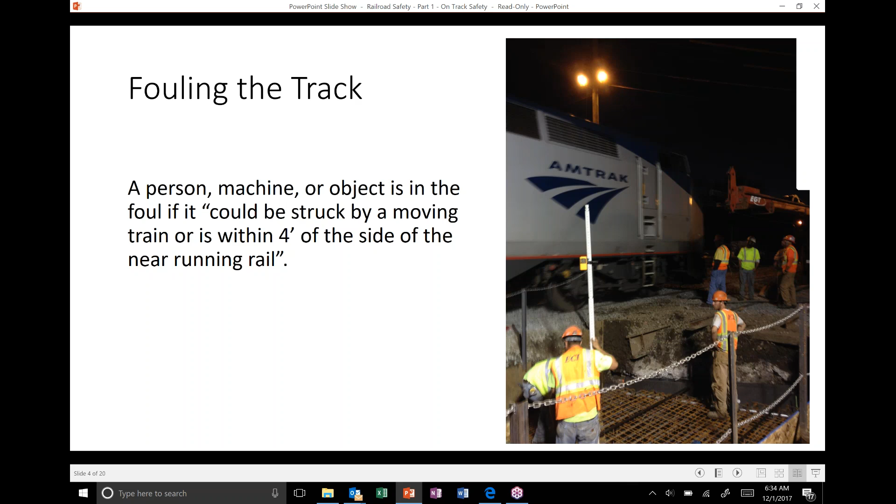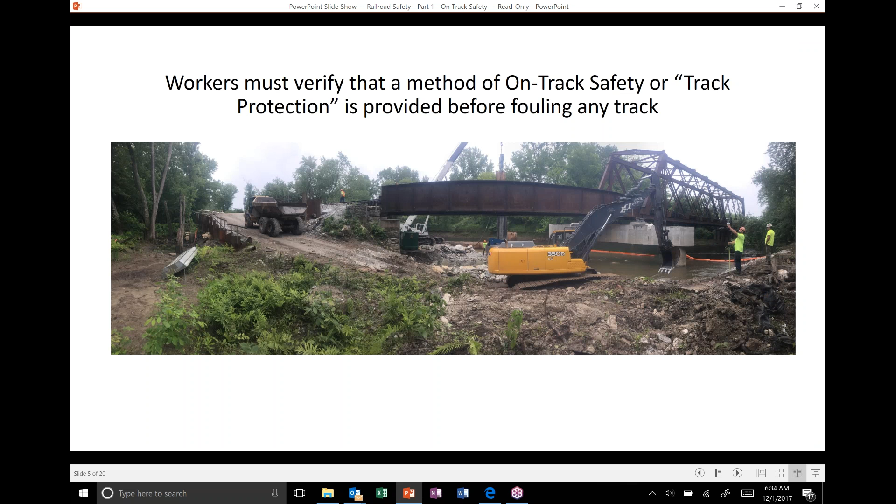So you're required to have on-track safety or track protection before you foul the track. It's any condition in which you, your machine, or material could interfere with train movement or be struck by a moving train or maintenance equipment. The rules state that workers must verify that a method of on-track safety is in place prior to fouling the track. So know before you go - don't just roll up to railroad tracks. You've got to verify that there is on-track safety or somebody has track protection before you foul.

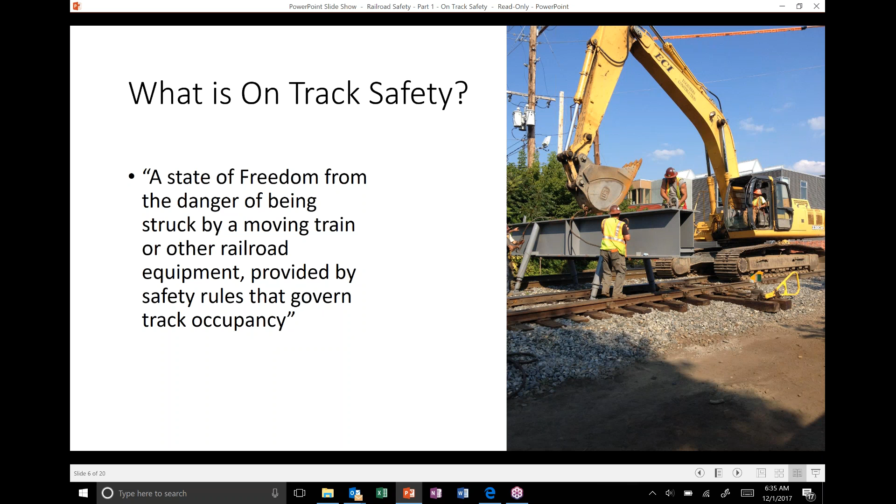What is on-track safety? You need to have this before you foul, but what is it? The definition in GCOR, the General Code of Operating Rules, is a state of freedom from danger of being struck by a moving train or other railroad equipment, provided by safety rules that govern track occupancy. So track protection is usually a procedure, paperwork, that is often coordinated between a flagman and the railroad dispatcher who's in control of train movements, protecting you over a certain area from trains so that you can do work on the property and on the tracks safely.

So why do we need on-track safety? There's a lot of rules around the railroad industry and around track and occupying the railroad. Why is this important?

The reason is trains can't turn. They take a really long time to stop, and when something happens, it's really bad. Unlike a highway, which is designed so that you can stop short of anything you might hit before you hit it, that's not the way railroads are designed. They can't be designed like that.

This is a first-person dash cam, basically, showing what the conductor might see going around a curve. In this case, there's a work crew just down the tracks. He's not going real fast, maybe around 30.

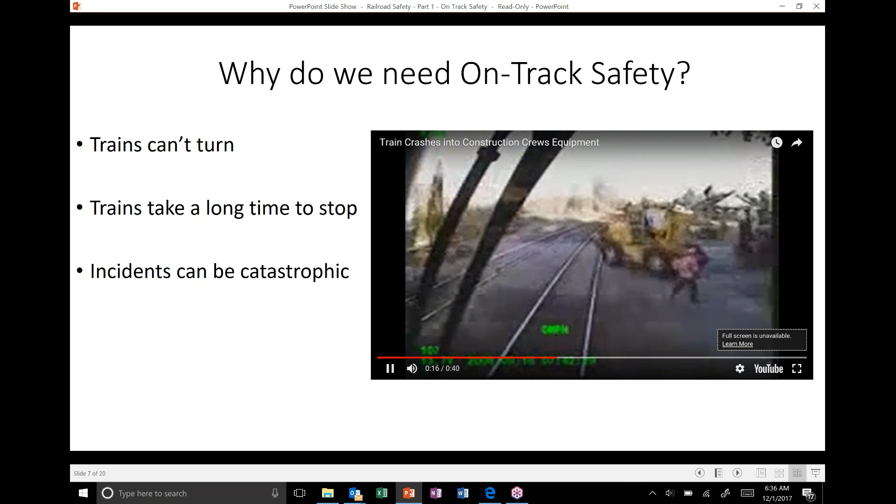He's sounding his whistle. The work crew probably knows he's there and coming. He doesn't see him till right now. He hits the brakes, it's too late. Tags a loader, not that bad. The loader man could have broken his neck. It's hard to say, we don't know. But it can certainly be a lot worse than that.

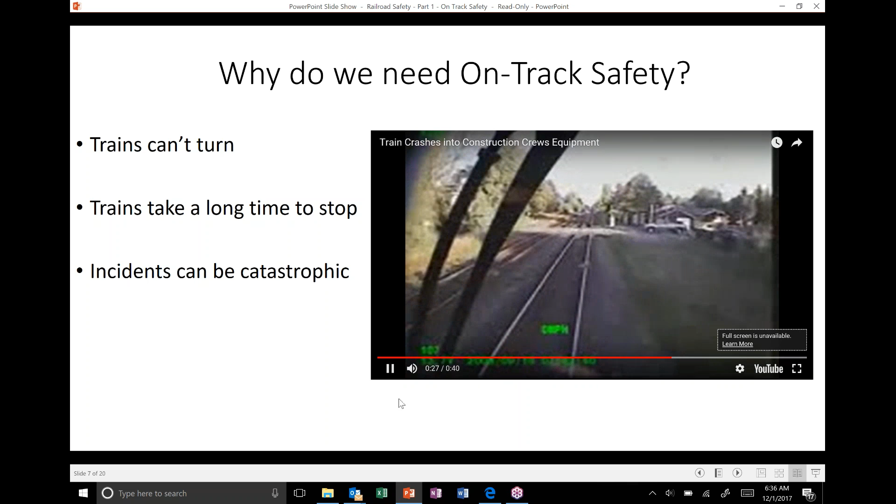That's what the train sees. It's probably not the train that's gonna be the most affected when something happens if we're not using proper precautions.

Here's the other side of things. Here's a low bed with a crane on it stuck on a crossing. Obviously a lot more severe on the receiving end.

So it's really important on track safety. Before we foul the track, we need to make sure that somebody has track protection. How does that take place? That's the railroad flagger, or the EIC, which stands for employee in charge. That's the person that's going to provide on-track safety or track protection for us.

The EIC is usually always a person qualified by the railroad. They're usually a railroad employee. On the New England Central Railroad, we have certain employees at ECI that are qualified flagmen to get track. But on all other railroads, this is going to be a railroad employee.

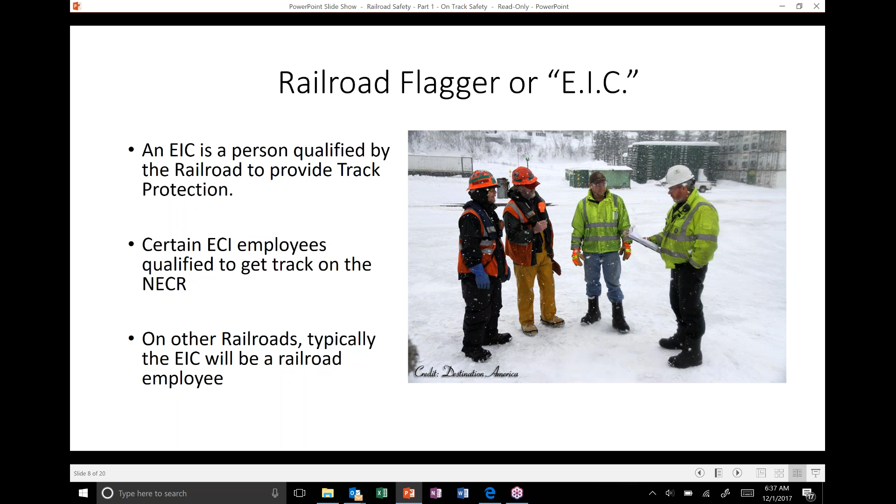The way that we're going to determine whether we have on-track safety, and what the specifics are, is going to be through a job briefing. This is something that's going to happen every shift, at the beginning of every shift. When you do your tailboard, the EIC should be and will be included, and he's going to tell you what he has for track, what the limits of the track are, the specifics, if it's a Form B, what the time limits are.

Those are all really important things to know. You're actually required to keep track of this information. So it may just seem like numbers. 'LYN 55, milepost 38 to 40, do not foul limits ahead of 661.' Well, that's fine, right? It's just a bunch of numbers. Well, yeah, but you need to know that. You are required to know that.

An FRA inspector can ask anybody at any time what track protection you have, what the limits are. So these briefings are very important, and it's very important to take information away from it. The best way to do it is to actually have it written and put it in your pocket. On the G&W roads, we often see really proactive flagmen making copies of their track protection and giving it out. That's awesome - we don't usually see that on Vermont Rail System.

I think a great way to do it is to have a job briefing form. Everybody can fill it out. We've got hundreds of these, I've got them in my office, I'll give them to you. Then, during tailboard, you can write down your track warrant number and your limits. It's a great way for you to keep track of it, and if you have to reiterate it to an inspector, you can do so.

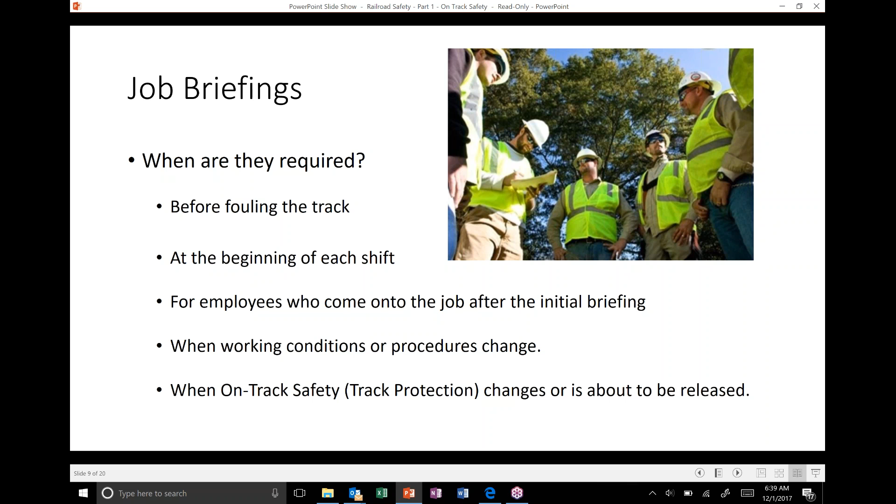We might have a new truck come in the mix. Again, you see your buddies on the track - that doesn't mean that you're good. You need to have a job briefing. Absolutely, 100%. You need to get in touch with the employee in charge and get a job briefing before you foul the tracks, even if other people in your work crew are already fouling.

What are we going to discuss? Method of track protection, the limits, provisions for adjacent track safety. If we've got a siding, how we protect it on the siding - the track warrant might apply to a mainline track, but we might have a different method of track protection on siding. And other normal tailboard topics, designated 911 callers, things like that.

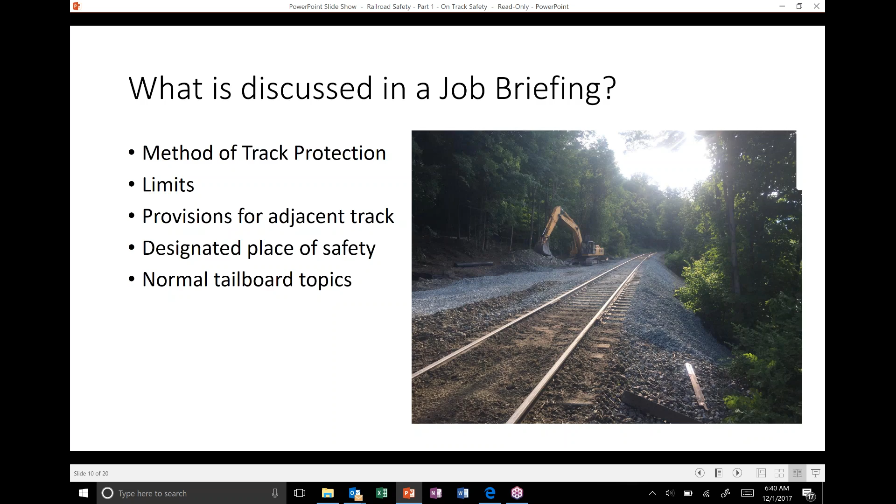So the most important briefing probably isn't that one at the beginning of the day where you learn what your method of track protection is. It's probably when you clear up. That's the most important briefing. Everybody might be there at tailboard and know that we've got a track warrant, and that's fine. But the big potential is when we give up track and we no longer have track protection, we can't be on the tracks. And that's the most important briefing, especially for people that might not be there.

So if the flagman calls the foreman, we got to clear up, train coming, okay, clear up, everybody's in the clear, foreman calls back, yep, we're in the clear, good, go ahead, give it up. That's good. But anybody that comes on after that point that may have been on the tracks all day absolutely 100% needs to be aware of the fact that we no longer have track. This is no longer safe. We cannot drive trucks across it. We cannot walk across it. Stay away. The best way to do that is have a designated person be there at the work area on the tracks and in control of it. That should be the flagman.

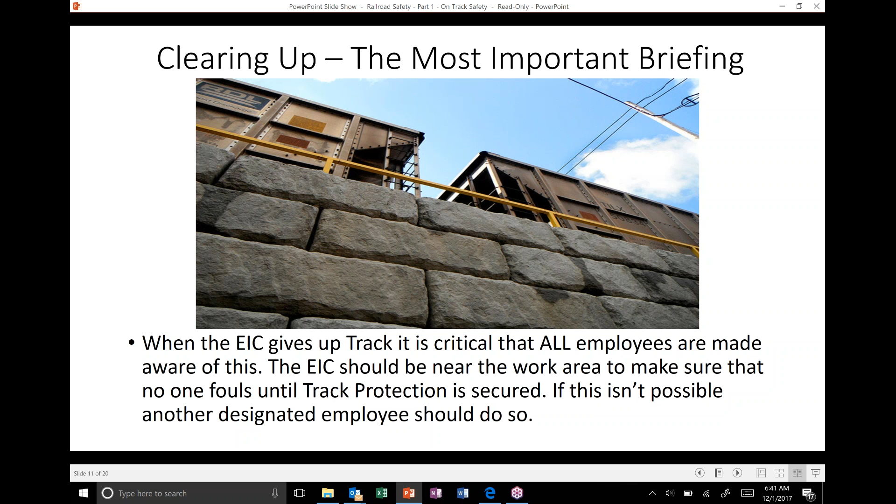That can be tough in situations like we've had all summer down in Addison County. We've had really spread out jobs and several jobs under the control of one EIC. The foreman needs to designate a person, if we can't have it be the flagman, to be there at the tracks and make sure that nobody comes in or out until the train passes and we have track protection established again.

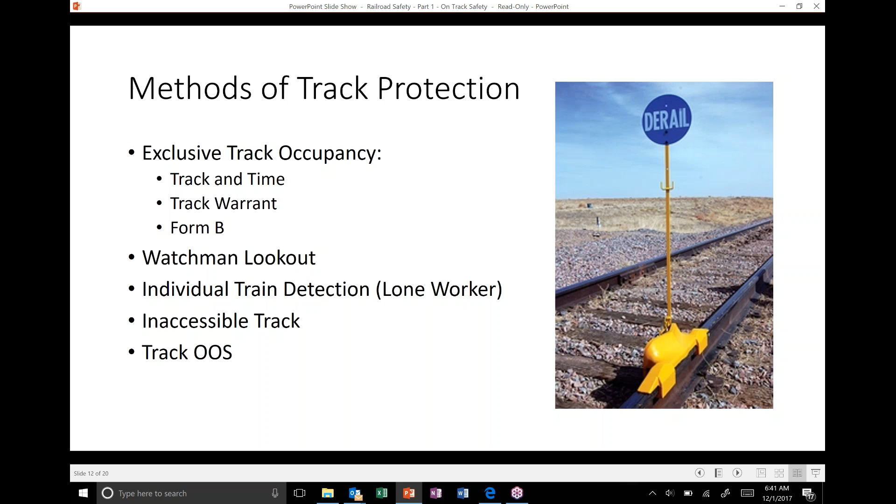Track out of service is another method of track control that you might see, especially on a shutdown for an extended period. If you're going to take the track out of service, you actually take it out of service with a dispatcher, and that's an appropriate way to do it.

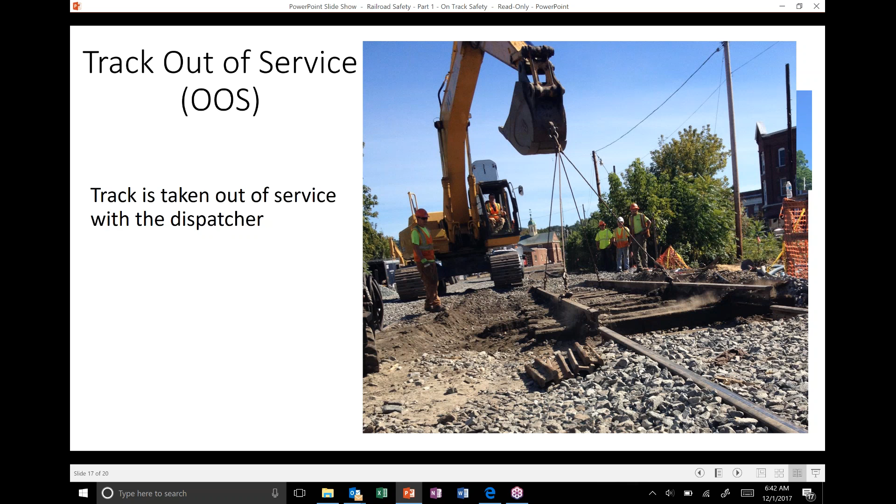So there's gray area when it comes to fouling the track. We learned that if you're within 4 feet of the nearest running rail, you are in the foul and you absolutely need track protection. That's fine. If you have the ability to foul the track, you should consider that fouling. The 210 in this picture isn't fouling, neither is the track truck, neither is, I think that's Scott. But the 210 could easily foul. He's got a swing to the left and he's fouling the main.

This is on the NECR. They're rolling into Brattleboro, so they're not going really fast, but right up the tracks they're going very fast. So if you have the ability to foul, or really any time you're working on railroad property, just assume that you're going to need to have a form of track protection or on-track safety and get in touch with a flagman. Or if you don't have a flagman, you should be talking to your supervisor and say, okay, do we have track, or can we even be there? Is this safe?

Close clearance should be considered too. Just because you're 4 feet away and you may not be technically fouling, that doesn't mean you can park your machine 4 feet off the track. That would still create a close clearance situation.

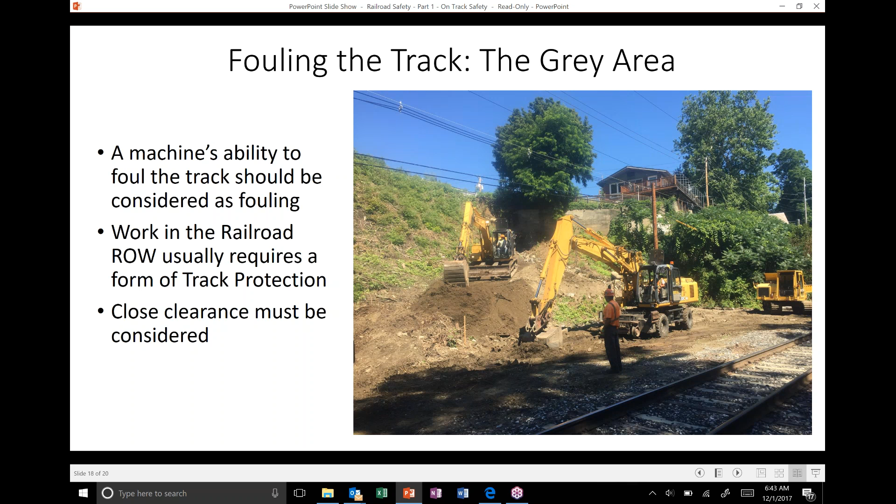When you're done for the day, you need to think about material. A good rule of thumb is bare minimum: any material or equipment that's above the top of rail height needs to be at least 6'6" from the nearest running rail, 8'6" from track center. That is the bare minimum. The further the better.

Additional considerations: even if you have on-track safety, you've got a good briefing, you know where you're at, you need to expect movements from trains in any direction at any time. It can happen. We had 2 close calls last summer. Neither of them were our faults, but one was very close and very scary. It can happen. Track speed can change at any time. A lot of us get used to working in certain places on the VTR with 10-mile-per-hour track, and that's not that scary. A lot of times they can stop short if they needed to, maybe not a big freight, but maybe a light engine could stop short at 10, especially on tangent track. There's track speeds all over the place in the VTR.

We're often working in areas that are compromised. They might put slow orders because we're there, and they can change those without notice. They don't need to tell you that they changed the track speed. We've seen it on the VTR this year. We've seen slow orders get lifted without letting us know, and all of a sudden our 10-mile-per-hour trains went to 25, which is a huge difference. We've also seen rail upgrades this year on our projects in Addison County, which raised the track speed as high as 40. So you're talking a huge difference in your ability to clear for a train.

Be vigilant, watch out for each other, and that's it.

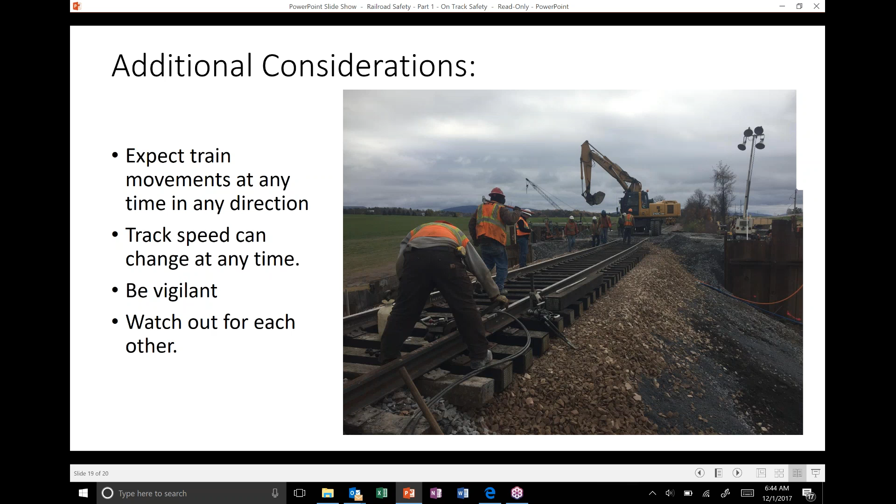On a final note, we lost Obie this week. Obie was Phil's dog. If you ever worked with Phil or on his jobs, you might recognize him. Obie had a quick fast acting cancer, and I think Phil put him down on Monday. So we're gonna miss Obie. That's all I got.

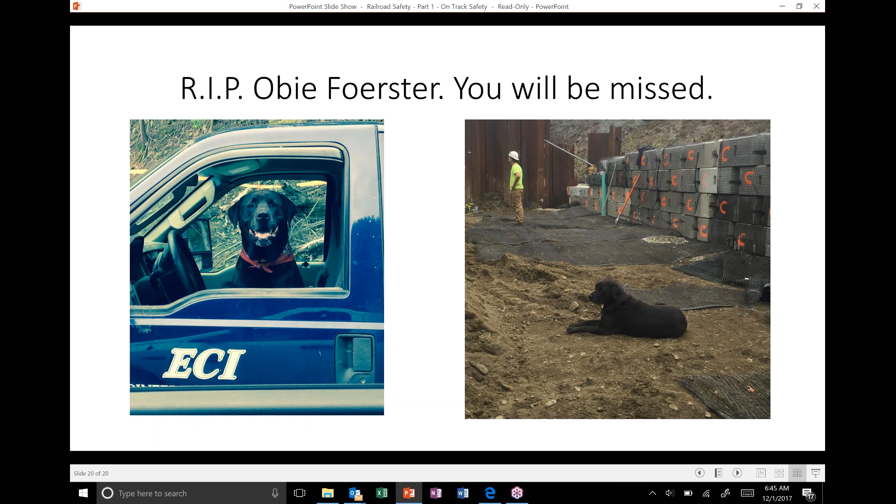Questions? Yeah, I have a question about if you're going to need track protection, who would you contact? Would you call the office? If you're going out to maybe work on a machine or go to a job site, the best thing to do would be to call the supervisor of that job. If not, you can feel free to call me. You can call Ron, or Gene too, but the first call should be the supervisor on that site.

How would you come up with your mile marker? Just give them your location. You don't necessarily need to, if you just tell them the location, they should be able to tell you very quickly if you're protected, if you're in the limits or not. You shouldn't be responsible for determining your location. If you say I'm going to this job site in this general area, they should know very quickly whether you are protected or not. And then before you go, you should still talk to the flag.

I always check in and check out. At least give a wave like I'm out of here, so they know, because it's also very stressful if there is a train coming, they have to get everyone off the track, and it can't account for people who might already have left because they forgot.

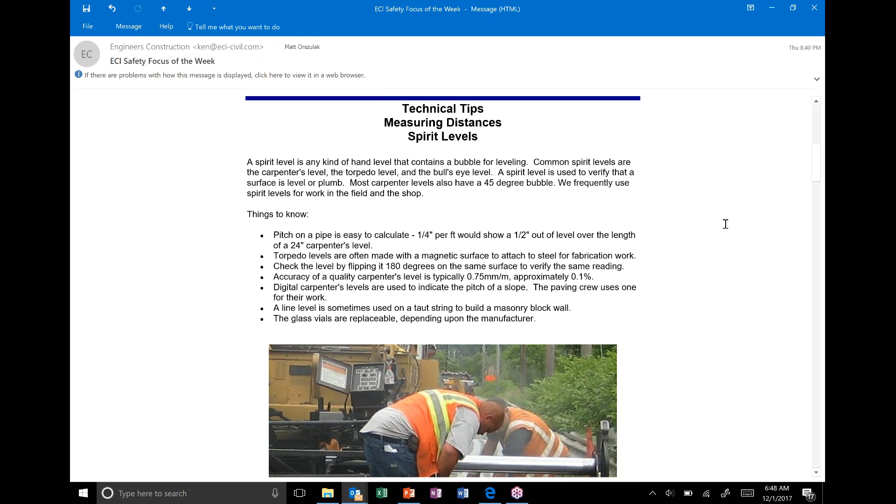There's a few things to know, mostly pretty obvious, but let's go through them. The pitch on a pipe is easy to calculate with, say, a 24-inch carpenter's level. If you have, say, a 1/4 inch per foot, then with your 2-foot level, that's 2 times that 1/4 inch, or 1/2 an inch of deviation from level when your level is level relative to the pipe. So it's a quick and easy check on pipe pitches and slopes.

Torpedo levels are often made with a magnetic surface. Kind of nice, you just stick them on your material, either hang them or even rest them on top. They secure much nicer to metal, obviously, with a magnet.

You can check your level by flipping it 180 degrees on the same surface. If you were level to start with on one orientation, when you flip it around, you should be perfectly level in the other direction. If not, there's a problem.

They could get bent, or the vial of the bubble vial could have loosened up. Accuracy of a quality carpenter's level is typically considered 0.75 millimeters per meter. You can convert that to a percent, and it's about 1/10 of a percent.

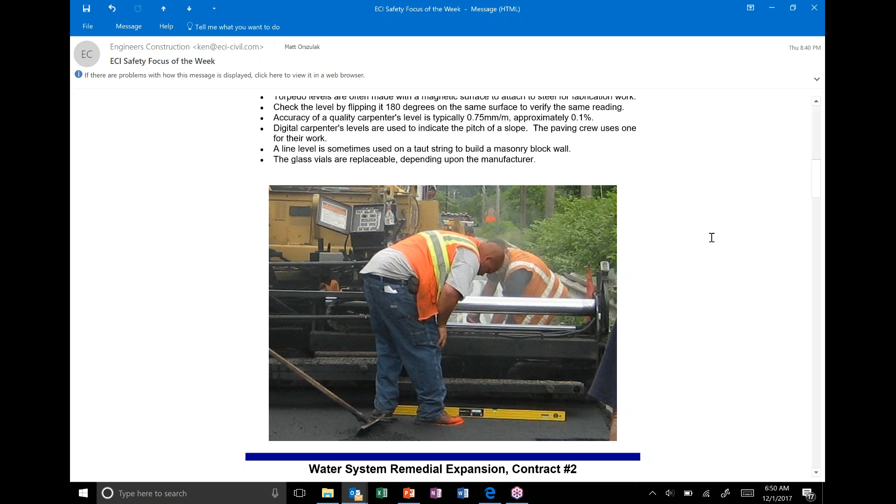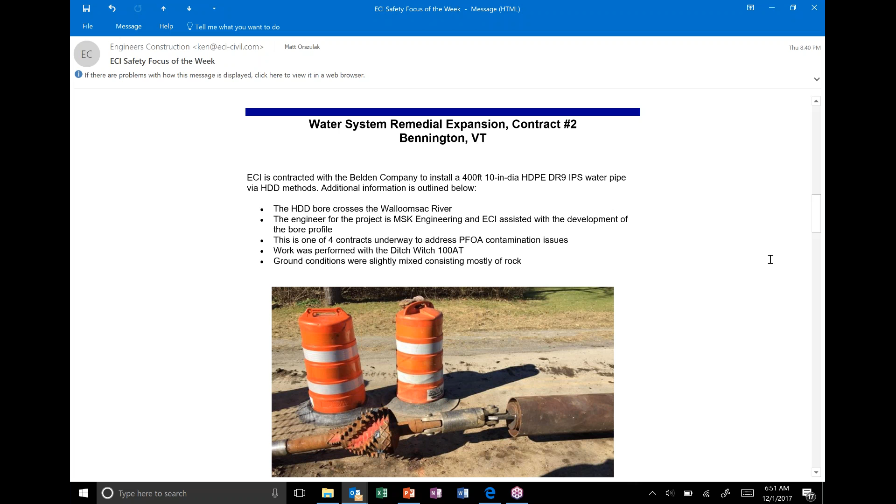For projects, we're highlighting the water system remedial expansion, contract number 2 in Bennington. We're contracted with Belden company to install 400 feet of 10-inch diameter PE pipe, that's a DR9 IPS, as a water line by HDD, horizontal directional drilling methods.

The basics are that it's under the Walloomsac River. The engineer for the project is MSK, and we assisted with the bore profile design. This is one of 4 contracts underway to address the PFOA contamination in the Bennington area.

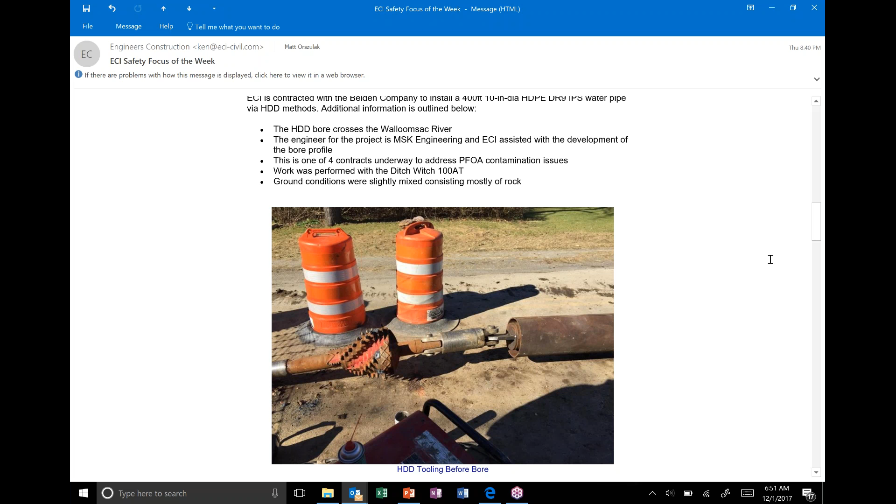Work was performed with our Ditch Witch 100 AT, all-terrain, dual rod system. Ground conditions were mixed and then mostly into rock. Once we were into rock, it was a soft, shaly rock.

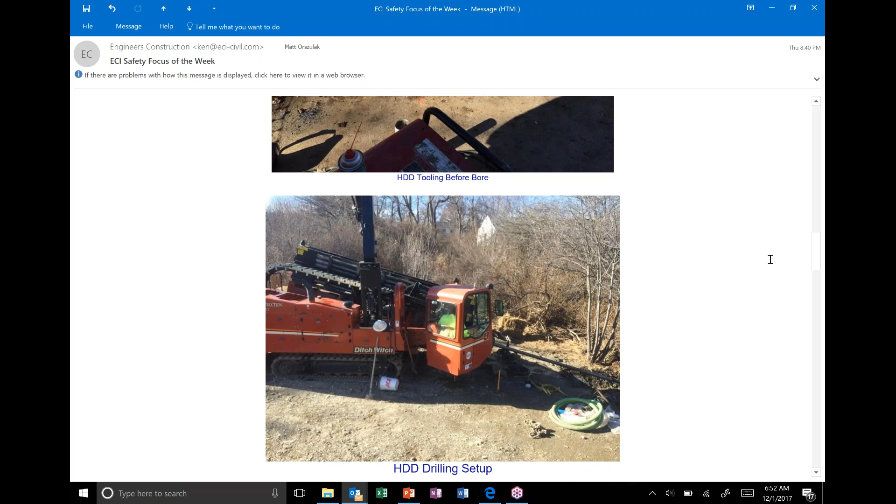There's the reamer, and it looks like they have a sleeve over the end of the pipe. There's the 100 going in - obviously the river is in the forefront that you can't see. This is after their first ream, or the final ream before pulling the product pipe.

Just a little bit about the project: the purpose is to provide municipal water to about 200 Bennington and North Bennington homes that are within the PFOA contamination zones at 2 areas.

PFOA is perfluorooctanoic acid. It's a widely used chemical throughout a variety of industries - some of the local manufacturers used it for this, but it's also used for cooking surfaces like Teflon and that kind of stuff.

Food packaging even has it - like potato chips, that funny plastic apparently has it in there. So it's everywhere, and it's a toxin and carcinogen, and is very persistent, meaning it doesn't break down in the environment.

It's a pretty significant contaminant, and ever since this Bennington thing came up, they've been testing it all over the place and finding, oh yeah, well it really is here and there.

The project is funded by Saint-Gobain Performance Plastics. They were the last owners of the factory that manufactured it. They acquired the facility from ChemFab, who were in North Bennington.

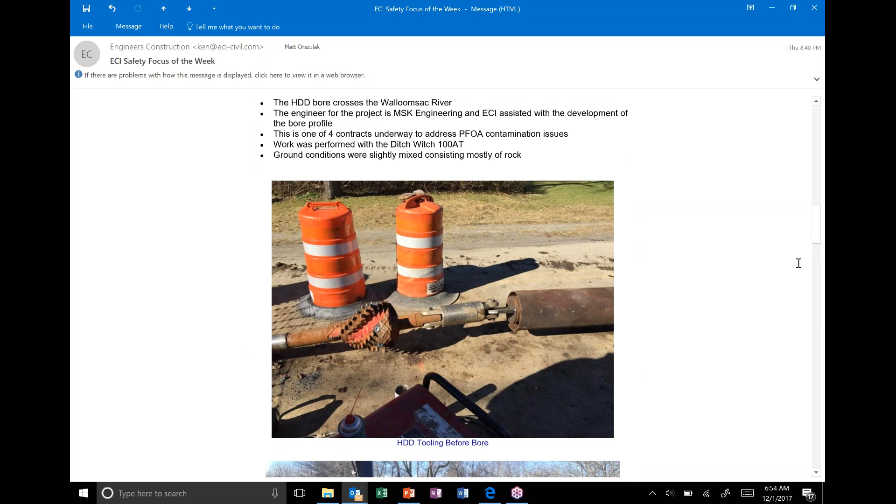There's a link to some of the Vermont DEC website pages describing the whole thing. But the purpose here again is just to provide a distribution line, or transmission line, underneath the river to distribute throughout a new community in Bennington.

Does everybody have wells? They were all on wells, right? So now they're converting over to municipal water.

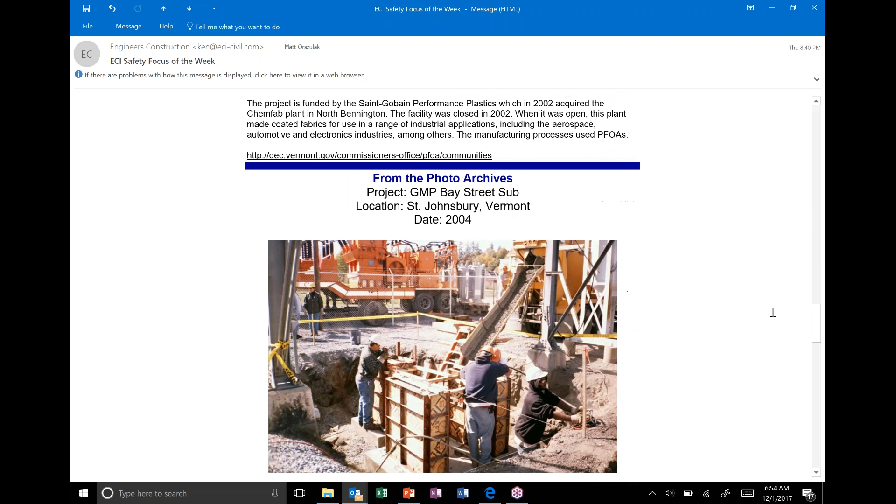For the project photo archives, we're looking at the GMP - it's now the GMP Bay Street sub. When we did this work, it was a CVPS. This is over in St. Johnsbury. We're putting in some switchgear foundations, down on Bay Street or Bay Road, maybe.

It's that area down below Allen Lumber. You go under the tracks, and from the center of St. Johnsbury to the east side, right in that area where the railroad is, you'll find the substation.

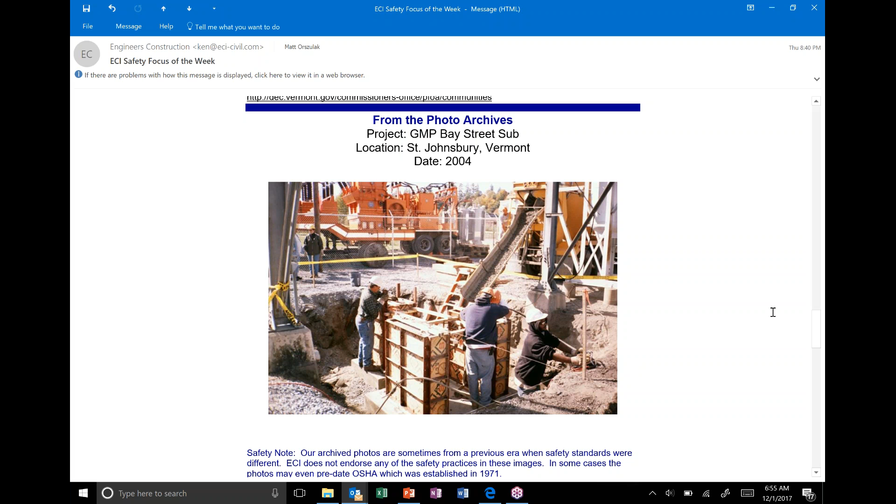Let's see who I have. Jesse Littlefield.